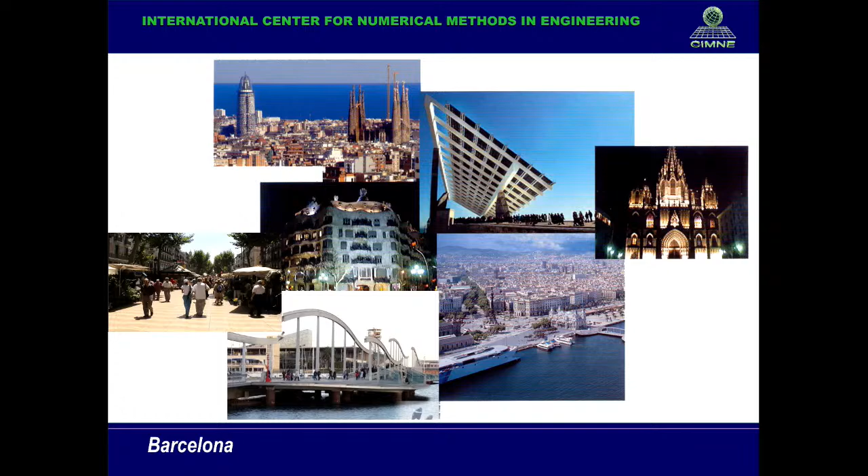And now that I am a member of this community, I invite you as a colleague. We created this organization in Barcelona 35 years back with the aim of being a transverse organization that will take the knowledge that we learn, in my case civil engineering, to other fields.

Now this center has expanded. We have some 300 researchers from many different fields, and we are located in several places in Barcelona. We don't have a CIMNE tower, we have several CIMNE buildings. And this is our new building now, next to my office. In all our buildings, we have a penthouse where you can see the sea.

This is what you see. Well, at the end, you cannot see... oh, this is the sea. This is the Mediterranean Sea.

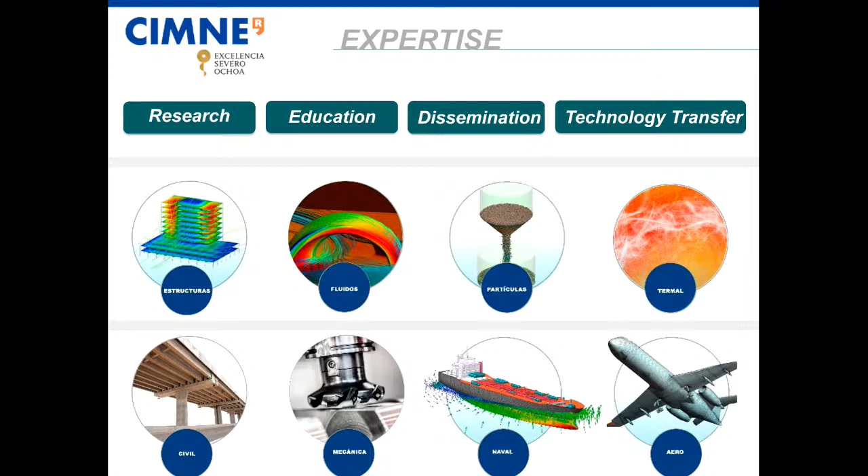As I mentioned, we cover many different fields in mechanics. I'm not going to enter into the details of what we do, but perhaps I will tell you that we have been selected as a National Center for Excellence, and these are the keywords that we use to be selected. We are committed to do research in construction and transport. And transport for us means aeronautics, naval, road transport, railway transport, environment, energy, and security, very important issues. And of course the manufacturing sector and anything to do with new materials, biomaterials, electric-based materials, and metamaterials, materials with unique properties that you manufacture using additive manufacturing techniques.

We are a famous center, but we are not the most famous organization in the city. And we know that, and we have to acknowledge this. So this brings us down to earth. What are the important matters in Barcelona?

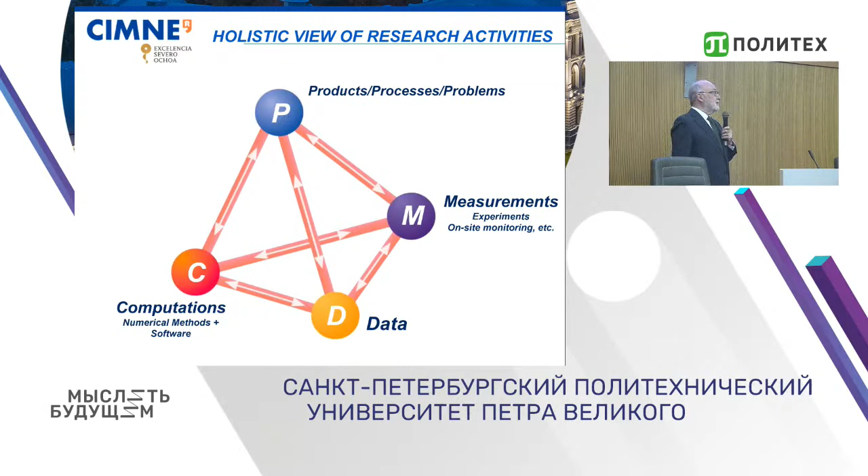Our role is to take any idea that originates in the university, like a plant, like a baby, or like water flowing, it needs to go through different phases. To reach success, you have to succeed in the independent phases. A PhD is the result of research at the university, but a PhD is sometimes not used, or repeated, because the student moves on.

So there is a need to explain that there is a role for these institutes, as you have here. And this is perhaps not the end of the story, it's half of the story. Then the companies do the rest of the work, and then the market, society, is the final ending.

The innovation here is that we have set up this link of cooperation at the university side, and also created our own spin-off companies that help us in this cycle of ideas.

Now coming a little bit more technical, and I'm going to perhaps abuse your patience, I will tell you some very basic things, and perhaps some other things that might be more interesting for those of you who are experts, but I didn't know what was the expertise of the audience in general.

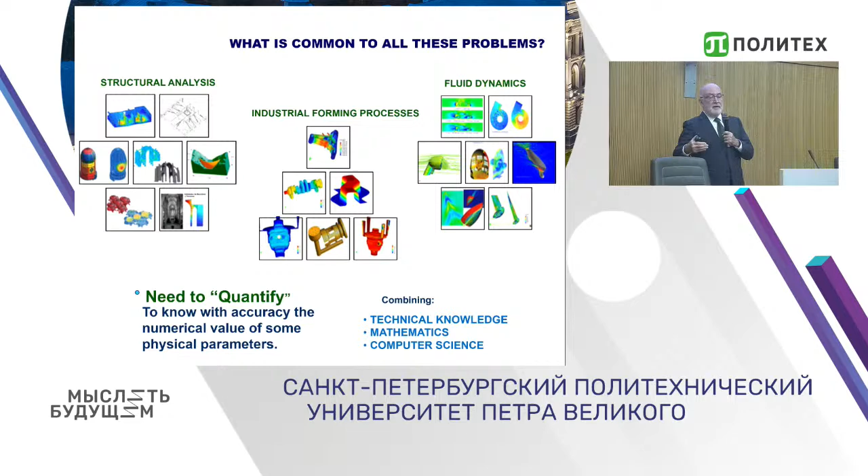To quantify means to produce numbers, we need to know about the problem. It's very important to know about the physics of a mechanical problem, which is different from another one. We need to express this in mathematical equations, and we need to solve these equations.

In fact, everything comes from our perception of reality. We can produce mathematical models, and numerical methods is a tool to apply what we call computational models. So first is the mathematical model, then the computational model, and then comes the numerical methods to solve it.

This sentence impressed me when I read it. It was referring to models in economy, but I borrow it because we are criticized all the time that our methods are not perfect. Perhaps we should say: all computational methods are imperfect, they are not perfect, but some are useful. We have to admit that.

And this is what engineers have been doing all their life throughout history, making use of the available knowledge to produce useful things for humanity.

About reality, this is very important because now we are talking about different kinds of reality altogether. For instance, what is the scale of interest? Are we talking about the subatomic scale where we have numerical methods, or are we talking at the aircraft scale?

For each of these scales, the methods are different and the objectives are different. The mathematical models are different. So this is very important, and one cannot be an expert in all the scales.

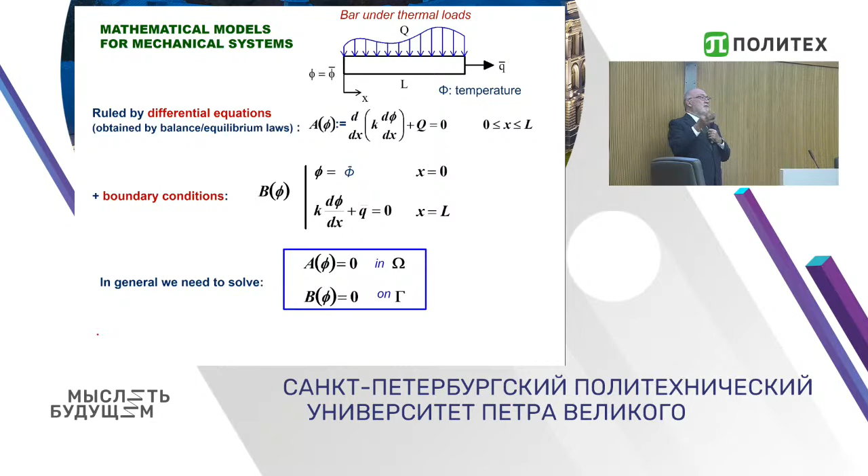This is the simplest differential equation with only one scalar, it's the temperature. But in general, they can be cast in this form: a set of differential equations with the boundary conditions that we need to solve. For years, for centuries, people have been trying to solve them analytically.

First, what we call static problems. Time is not involved in the equations. And you can read here the classes of problems that include these simple equations: structural mechanics and many other problems that are governed by this set of differential equations.

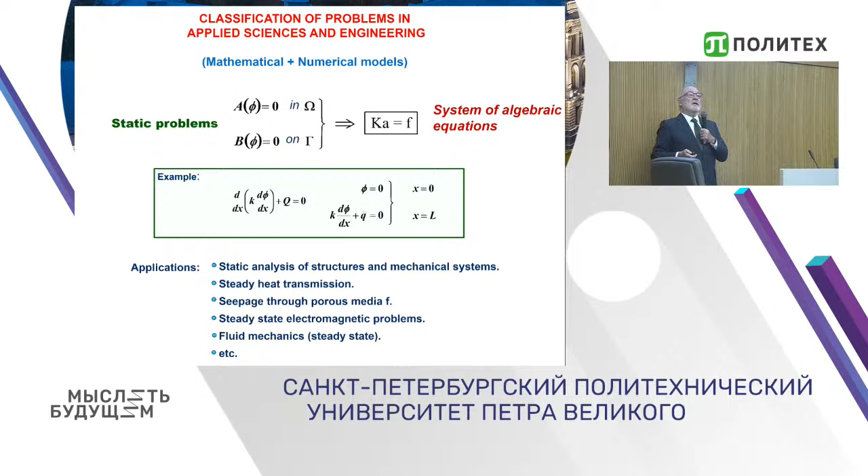When you introduce time, you have a class of problems which is all fluid mechanics problems that are governed by this type of parabolic equations with only the first derivative of the unknown; the velocity is the unknown. So this is a second set of big problems.

And the third class of problems goes back again to structural mechanics or acoustics, which is the second order dynamic problems. Okay? Each of these classes of problems requires a different strategy at the analytical level and at the numerical level. I think with these 3 classes of problems, we cover 90% or even more of the problems in mechanics. And when I say mechanics, I mean physics in general and engineering.

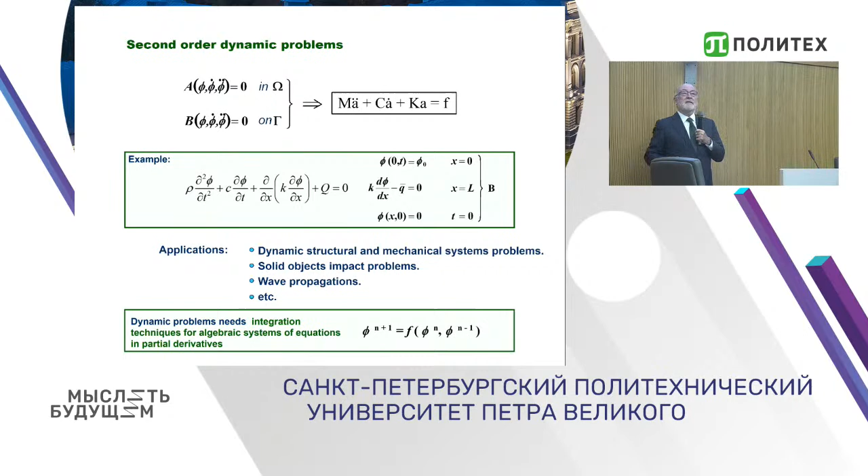And of course, the name of Timoshenko comes here because he spent his life solving analytically the first class of problems, and a little bit the third, dynamic equations. I just mentioned during my small gratitude speech during this honorary doctorate that when I was 19, I was introduced to Timoshenko in the books of elasticity and strength of materials.

And then I learned, we all have learned, and still we are learning about the expressions that he derived, solving analytically those equations. He belongs to the class of engineers who really looked at the equations, got solutions, and these solutions were applied in practice.

But not only Timoshenko. Last Friday, I took these pictures at home. These are books from Russian scientists that I used when I was a student. Most of them were published in Spanish by Mir Publishers, the publishing house from the Soviet Union in those days. I have these books at home; this is my collection of books. And I was very proud to recognize, acknowledge that my background comes from this cultural heritage from your country.

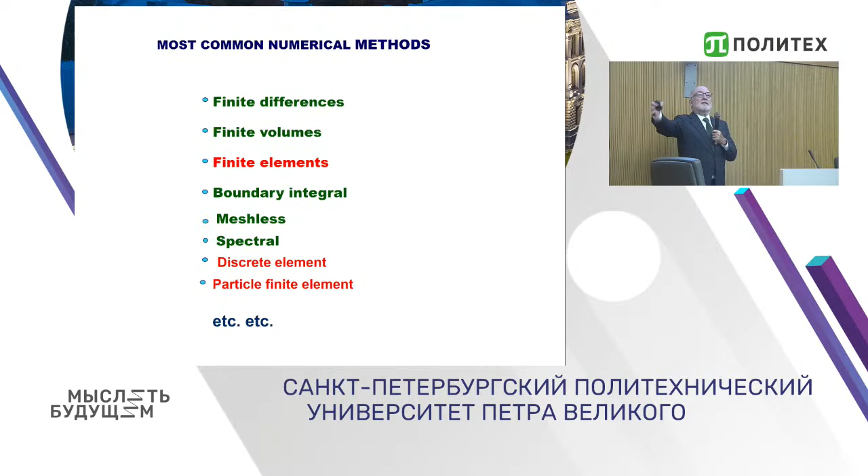And of course, this is not a course on numerical methods. I cannot go step by step revising all the numerical methods. I'm going to talk a little bit about finite elements, which is the recent past and the present, and about some new methods that I think are the future. Okay, and all comes from the so-called variational forms.

You know that most numerical methods are based on the discretization of the domain and using the properties of the integral, that it can be computed by summing the contributions from different domains. And this is the so-called weighted residual form.

You're familiar with this. You multiply the governing equations by weighting functions, and then you assume that the solution of this integral form for any arbitrary function is equivalent to the solution of the original equations. This is the basis of all numerical methods; even finite differences could be cast in this form as well.

And here comes the name of a distinguished academic of this university, Galerkin, together with Ritz and Bubnov, also from this university, and Petrov, also from this country, who developed classes of different methods applied to this general framework of weighted residuals.

And in fact, this is a personal note, I'm sorry, but I'm very proud to carry the name of Galerkin in my curriculum, because I was awarded the Galerkin Medal from the European Association for Computational Methods only this September. So this is a double privilege for me for being here today.

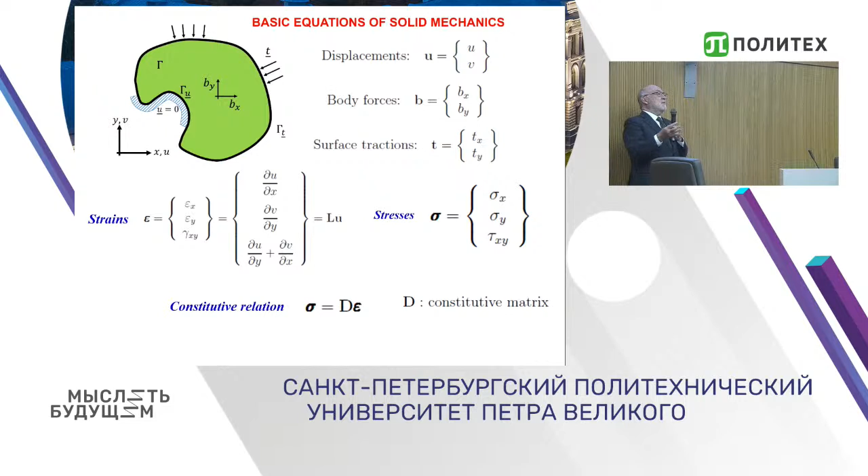Look at a problem in structural mechanics, a simple problem. You have displacements, forces in the boundary, in the body, you have the strains, you have the stresses, you have the constitutive form. This will be the basis for obtaining the differential equations, which are obtained by equilibrium. Sum of forces equals 0 in statics. And this gives you the equilibrium equations in the body and in the boundary. And these are the equations that Timoshenko solved, expressed in terms of displacements.

When we apply weighted residuals, we multiply these by weighting functions. Now, these weighting functions are what we call virtual displacements, and then you obtain the weak form by integrating by parts. What you obtain is the principle of virtual work. So the principle of virtual work is nothing but the Galerkin form of the differential equations in mechanics.

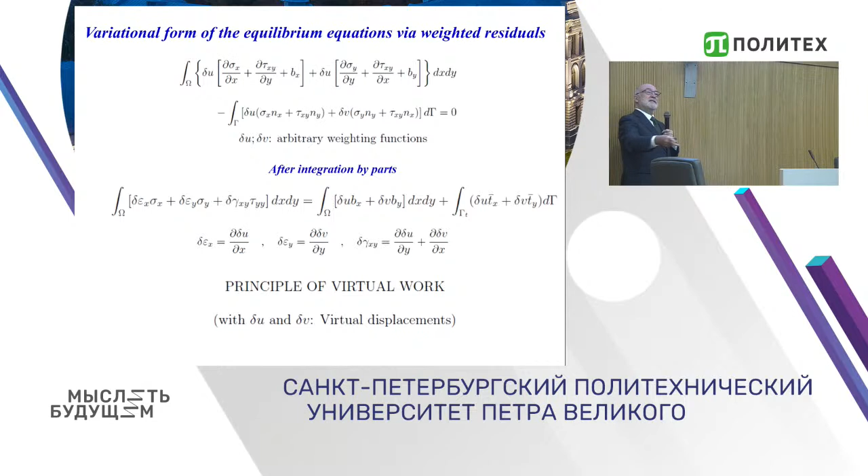But the beauty is that when I lecture in my course to final year students in civil engineering, and I teach finite elements, I don't start with equations, and I don't start with Galerkin. In fact, I don't talk about Galerkin. I start with this expression. It's equivalent. And the beauty is that it also can be interpreted in terms of work. The work of the external forces over any arbitrary displacement is the work of the stresses in equilibrium with the actual forces, the work induced by the virtual strains.

So from this moment on, I don't say we can forget about the past, but we can start from this expression. And this expression is independent of how we obtain the stresses. So it applies to any nonlinear material. It's also independent of the size of the displacement. So it applies to any problems of small or large displacement. It also applies to dynamics. So it's a universal form from which I can derive any approximation method.

And also, if you look back and you interpret the internal work and the external work as a variation of the actual work, you see by this simple manipulation you derive the principle of minimum potential energy. Simply, look, it's expressed in the transparencies. I'm not going to detail. But all the energy theorems that I studied, Castigliano, Menabrea, when I was a student, I was using energy theorems. When I was a postgraduate at Swansea University, I learned that this is a consequence of virtual work.

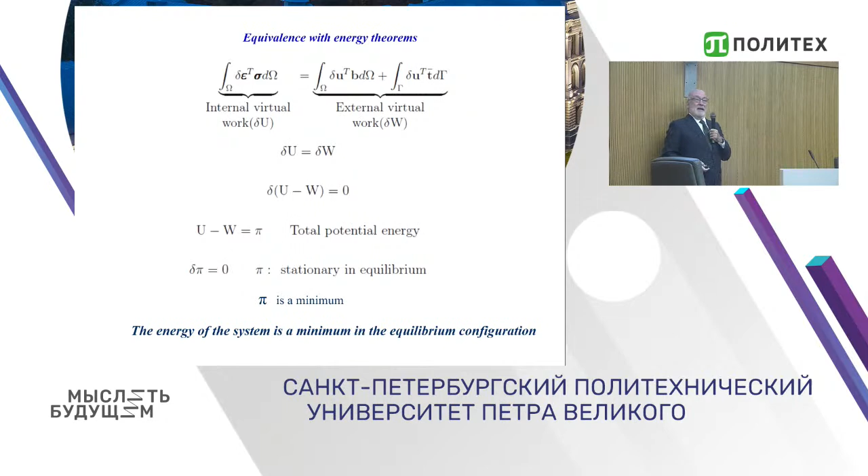And then if you assume that the problem is elastic, and you introduce the elastic constitutive equation, then you have the standard force equals stiffness matrix times the displacements. So you see this. I found this historical development fascinating, because now we have a systematic way to apply any discretization method using virtual work.

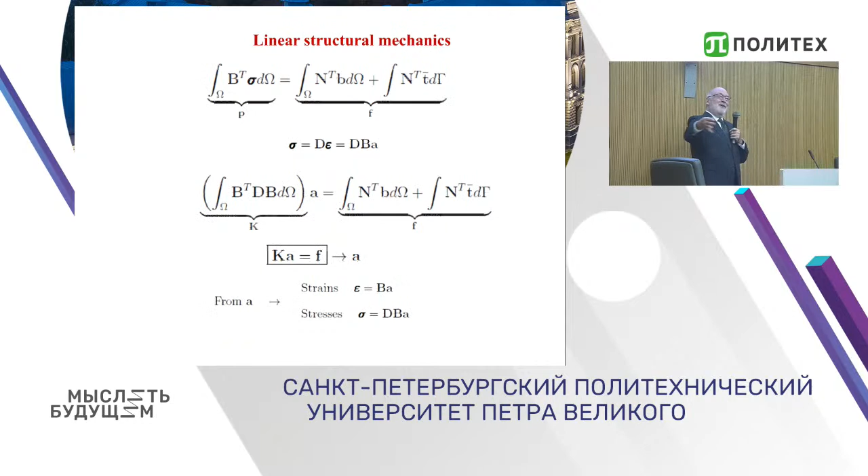Well, it's new. We can see that it's not so new. This is what Archimedes did to compute the pi number. He used an element, the segment. He used a discretization, the number of segments, inscribed or circumscribed, and he obtained bounds for pi.

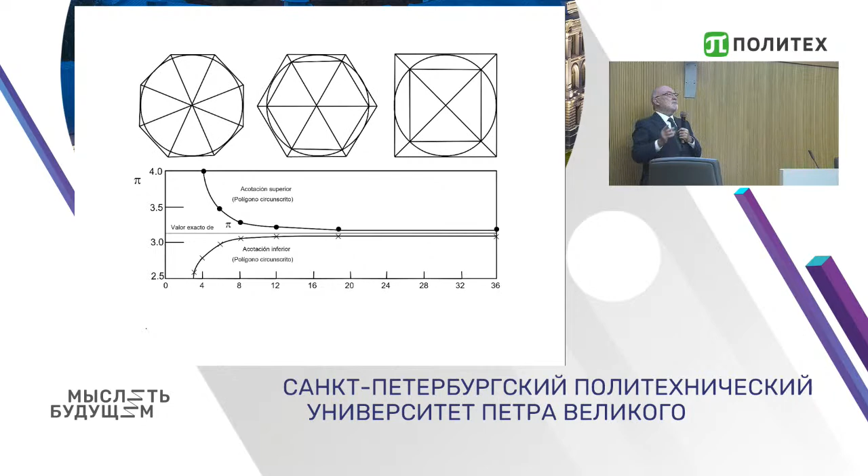By the way, pi is a number with infinite digits. It's a number you cannot compute exactly. So I think this was the first idea of approximation using this concept of discretization and subdivision. This was 300 years before Christ. And it took 7 centuries to find this reference of a Chinese who used the concept of areas to obtain bounds for pi.

So I found this interesting also to put it as a kind of historical background of what we're doing, historical perspective. And in fact, before I learned finite elements, I knew how to compute hydraulic networks. I knew how to compute an electrical network. I knew how to compute a structure using matrix methods. And I knew that I could use the information from an element, use Kirchhoff theorem, sum of fluxes equal the external flux, or sum of forces equal to the force, and go from the element to the structure.

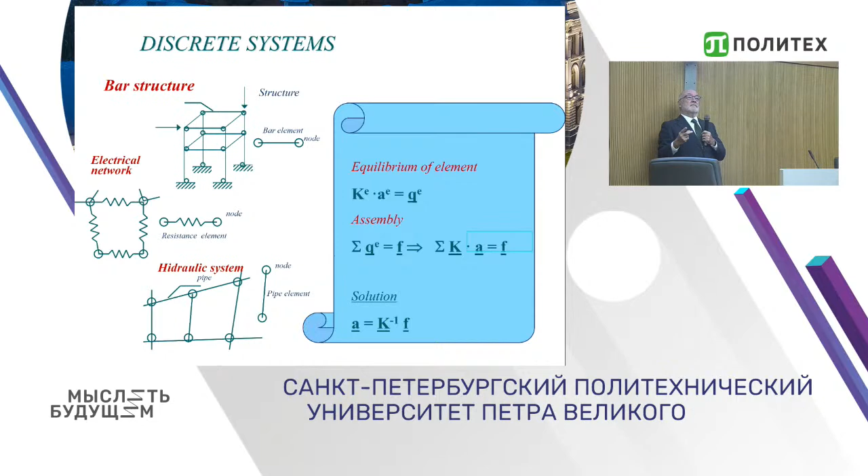And this is what we do with finite elements. In finite elements, we have more complex systems, but you have the same; precisely, this is a copy of the past transparency. But now, the element we create, we don't have a pipe, we don't have an electrical network, we don't have a bar. We invent the element, but we follow the same trend. Look at the element, look to the balance of the element, use a general balance law, and get a general system of equations. Okay, so having understood that, we have made a lot of progress.

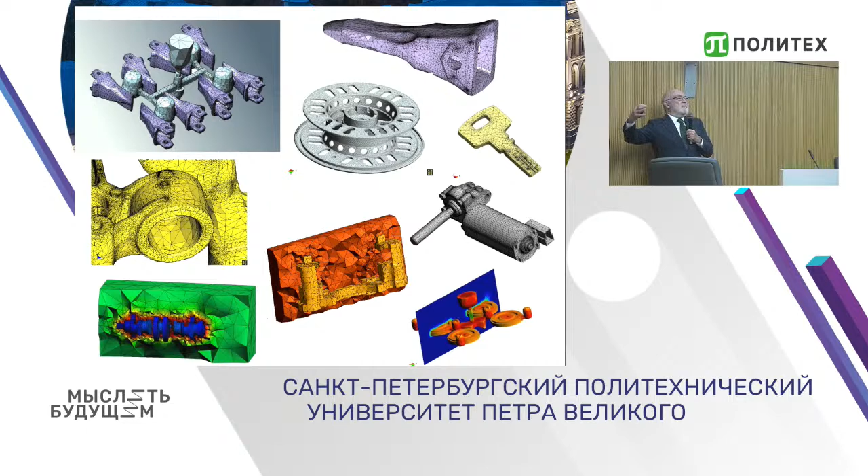The method can be applied, and this is some colorful reference after those equations of how we apply the method in structural mechanics, but I could use many others. In fact, also how we compute the strength of mechanical elements, and how we apply this to the many engineering sectors, in the mechanical manufacturing sector. Just three references if you want to have a collection of these pictures.

By the way, I will be happy to provide this lecture to Professor Borovkov later. If you are interested, you can have it all.

We have to acknowledge the work of Courant. Courant made a reference to discretization of a domain into triangles in 1943. But the first paper which is acknowledged to be the predecessor of the finite element is in 1956, by Turner, Clough, Martin, and Topp. But the name finite elements was not used until 1960, by Clough. Okay, so perhaps some others are missing, and this is like a work for the historian, to look into the archive of history. But this is how

I've been taught. But everything in my life came from a different place, from Swansea. Swansea is a beautiful spot in Wales, beautiful beaches, amazing place. Weather is okay, simply okay. But then I found this man, Professor Zienkiewicz, Olgierd Zienkiewicz. He was there at the right time. In the 1960s, he was a clever guy. He came from relaxation methods, from finite differences. He was from Imperial College, went to the United States. He came to Swansea, and then he saw the trend, and he jumped into the trend.

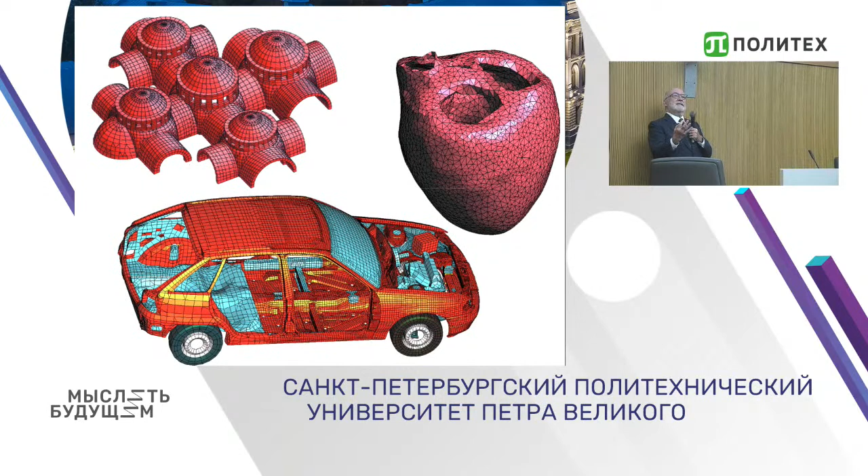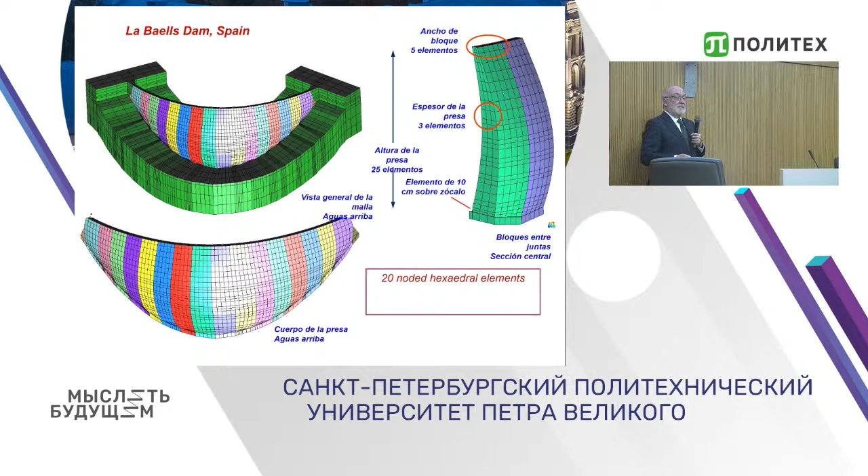In this one, a company is advertising the value of the methods they use to protect the texture of the skin, with finite elements. In the early days, finite elements were applied to dam engineering. Well, this is an early paper, 1970, a dam in China. Now, the use in dams is a regular practice. This is just one example of a dam in Spain. These are exercises that our students do to apply the methods that we teach them. So dam engineering is a reference for the past, and also for the present.

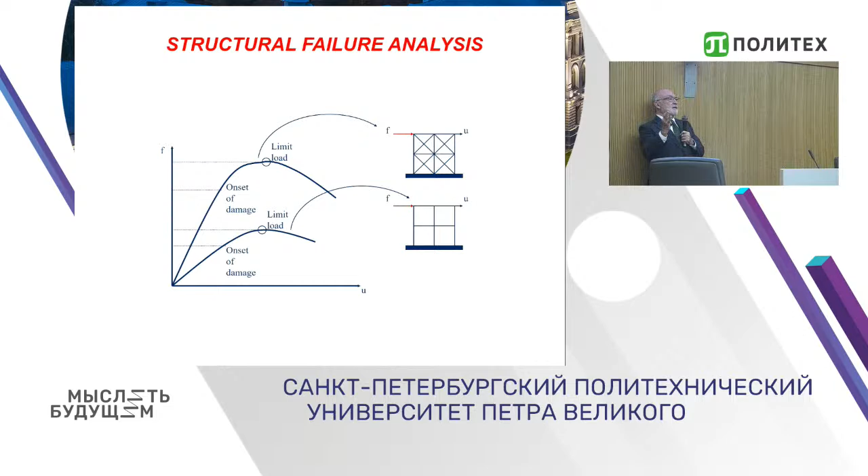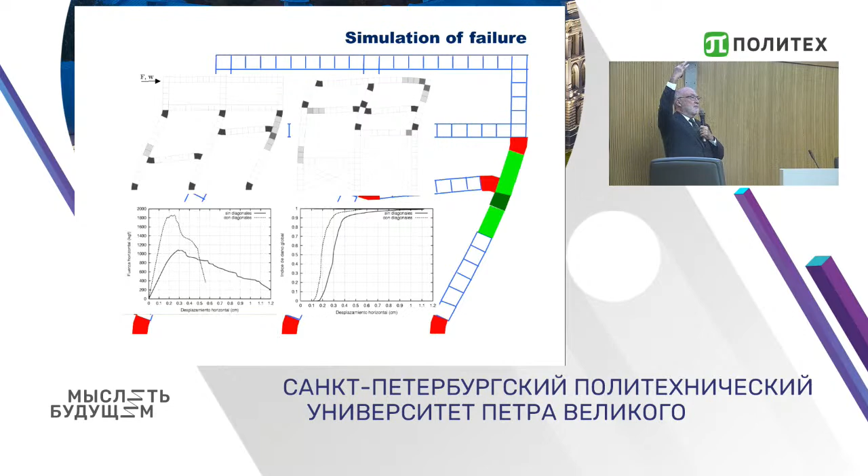But of course, we are not only interested in the design of buildings. We are interested in knowing the safety, how to protect the buildings, or how to enhance their properties by retrofitting some of the buildings. We're interested to see when cracks start, which is the failure load, and for that we need nonlinear analysis. And here comes the concept of virtual lab. A virtual lab is a lab that you build in the computer, and with that you break the structures, and you compare with some experiments. With this virtual lab we can push the structure and see when it fails, and we can see how we can reinforce some parts and get higher loads and improve the behavior.

And we have applied this concept to what is called forensic engineering. This building had many cracks. Why? Well, we take the building, we discretize, we increase the weight of the floor, we see when it fails, we see the cracks, and we compare this with existing cracks. This is called forensic engineering. Forensic engineering requires nonlinear mechanics. And this is very much applied now in the nuclear sector in Spain. We are still today involved in the study of the predicted safety of the nuclear plants in Spain.

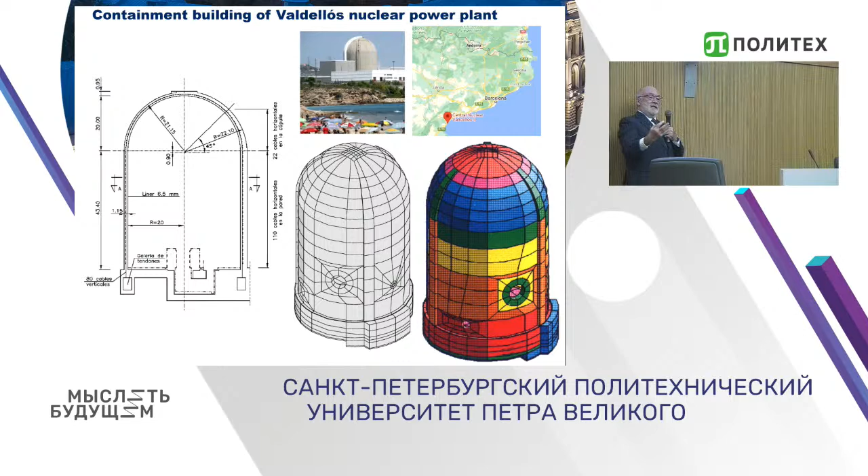There is a big debate in the world, and we are guessing that nuclear power is going to stay, for many reasons. What we are doing here is we see what will be the failure load of this containment building when, for instance, there is an increase of pressure inside. So we increase the pressure until we obtain the failure load. The colors are nice, but this is the main curve, which shows that as you increase the pressure you get damage, until the global damage reaches 1, and this gives you the failure pressure. And this is the comparison between axisymmetric and three-dimensional analysis. So this is what we are doing now with a number of power plants in Spain.

But this is also applied in historical buildings. Of course, here the financial or social interest is less important, but in Italy there is a big interest. There is a congress in this field that we have been organizing over the years. And for instance, I wasn't paid for this. The reward we got is that I walked on the roof of the basilica, and I could see that, for instance, these towers are fake. They are wood and copper, and the actual domes are of stone, and you can see them here. And here is the same.

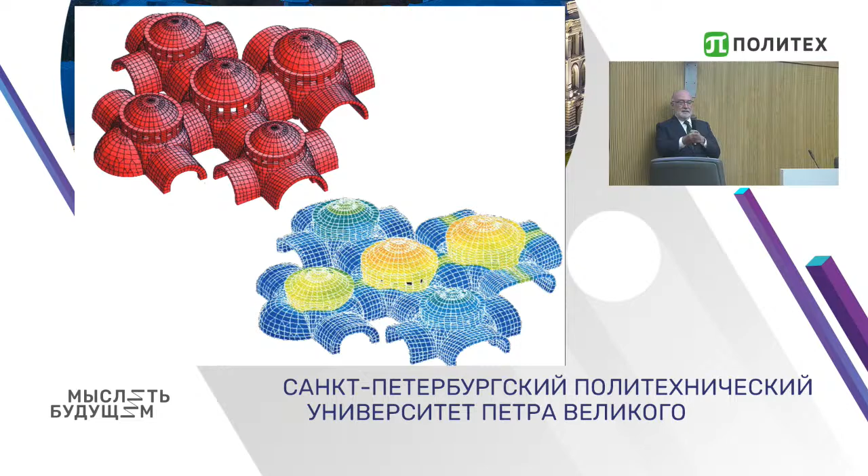We increase the weight. Damage produces the colors. There is no damage until you reach failure, and you can compute the cracks and the failure load. So another case for which we obtained the City of Barcelona award. For these color pictures, we were given an award.

And of course, we didn't know anything about the materials, so I think this was a non-deserved award, but we took it in any case. And you can see the concept of failure of a historical building. You increase the pressure, you increase the weight, and as you increase the weight, you can see that you actually destroy the structure. It's the virtual failure lab.

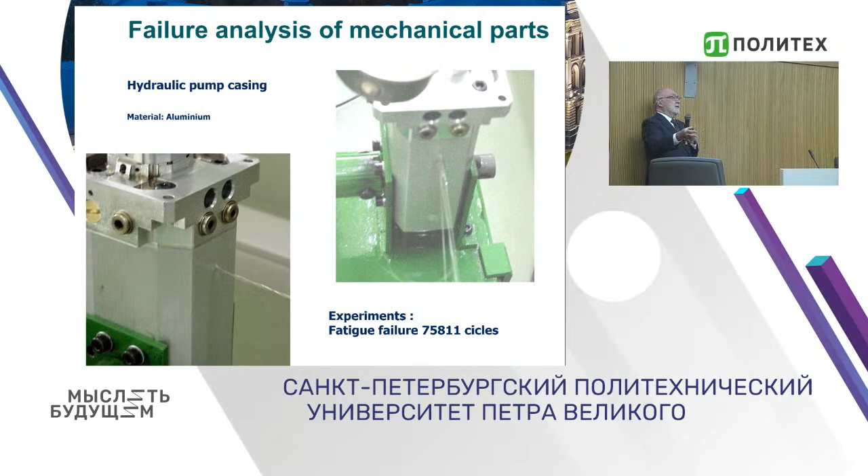You can apply it to real structures or to mechanical parts. This was the failure law applied to compute the failure, the number of cycles for failure of this pump casing that we computed. It's the same concept. Or to compute here, for instance, well, I will not put the video, the failure load of this composite that you can compare with experiments.

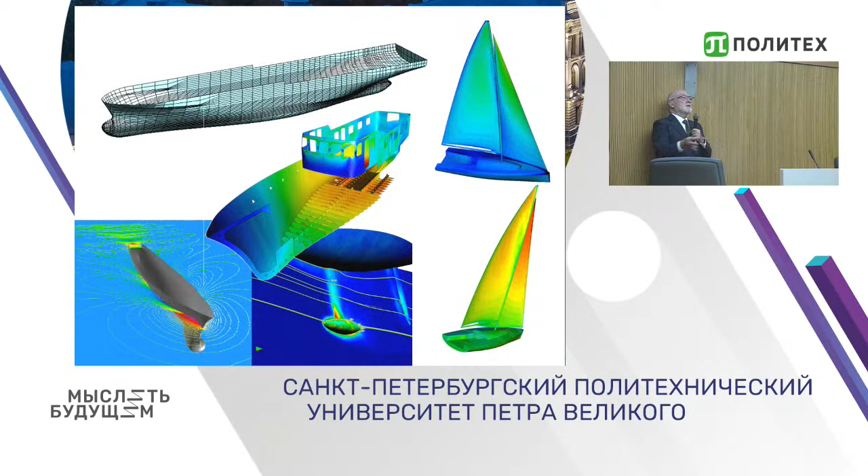A virtual towing tank is a space where you put your ship and you tow it and you compute the resistance. In this virtual tank you have to fill it with elements, then you put your ship and then push it. Here is a video that shows how this is like Moses; you fill the sea with tetrahedra, then you put your ship, and then you have to pull it. This brings us the problem of mesh generation and controlling geometry, which are very important parts of the analysis. This is an America's Cup boat, and then the importance of visualizing the results.

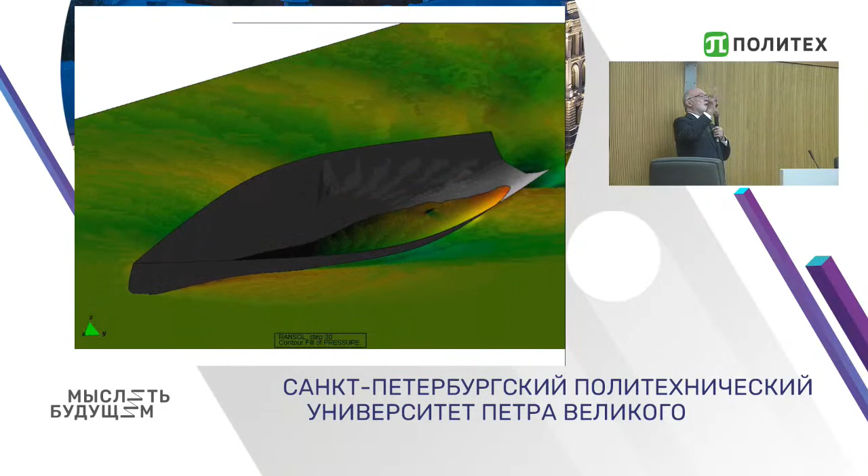Some people say that CFD is color fluid dynamics. Well, it is true that colors are very important, but numbers are also very important. So, in fact, numbers are more important. So this is just an example of how this is applied.

When you're dealing with fluids, you have the equivalent to the simply supported beam: you throw a sphere in water and you have to compute the speed at which it falls. And this is a very complex problem. It requires moving the mesh, and even the simplest problem sometimes we cannot solve because we don't have this technology. You obtain beautiful pictures, but at the end you have to compute. There is an analytical solution for that.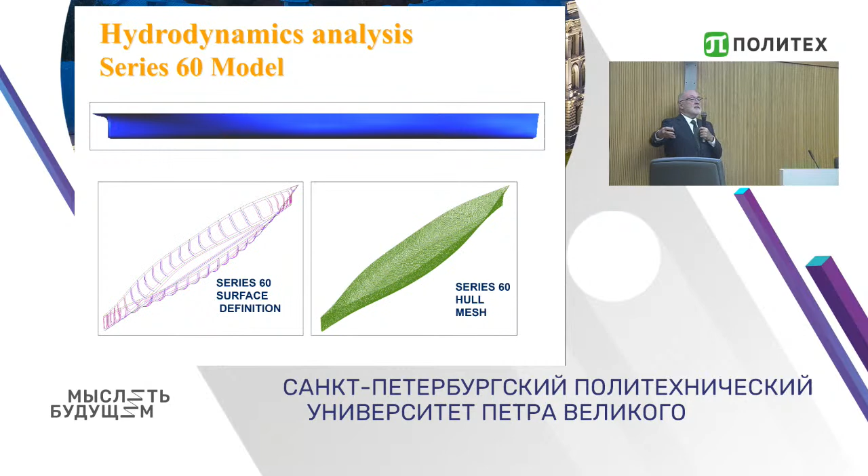And then you apply this to problems that the Naval Architecture School does as everyday practice. They take a model of a boat, put it in the canal, drag it, and compute the forces. With these forces, they compute the wave pattern and the resistance of the boat. Again, beautiful pictures, but this is the main result: the so-called drag resistance to Froude number. And this is the curve that is used to design the ships.

This curve you can obtain by experiments and then projecting to real scale, or by the virtual towing tank, and apply it to the design of merchant ships, or other ships not so nice, like this frigate. And here comes a problem. If you are given this data, how long will it take you to create the data for the analysis? For that, we have developed our own pre and post processors that you can freely use. This helps us clean this complex geometry and produce an analysis geometry like this one, from which we can actually do the computations.

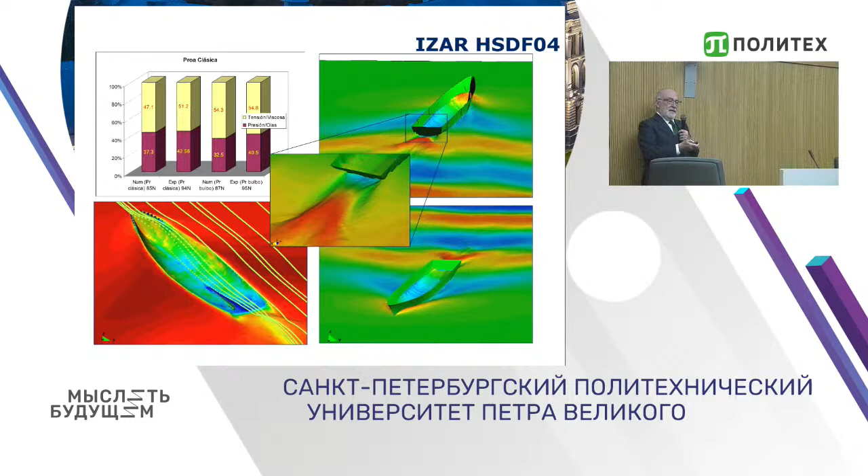So using this, we obtain the results, or do the structural analysis, which is like computing a building. These are examples of the virtual towing tank applied to this problem and this other one. This is an area of much interest now because of the global climate and the ice routes in the Arctic.

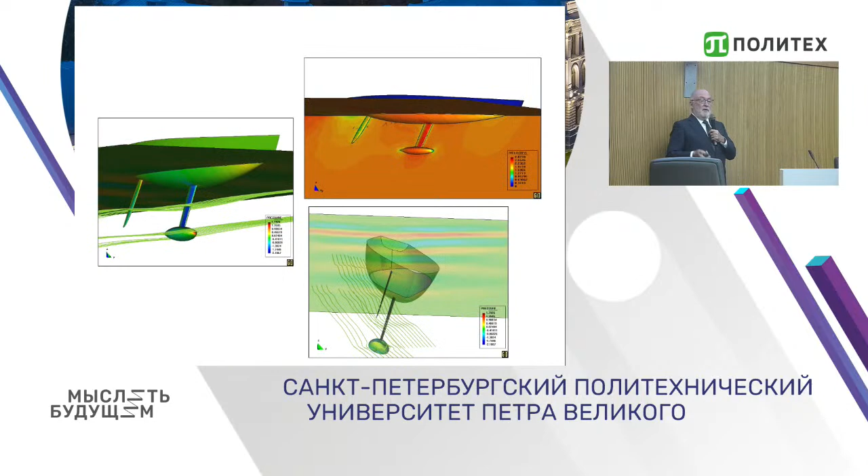And of course, if you don't like frigates or merchant ships, you can do sport boats like this America's Cup boat that we analyzed. We analyze the underwater behavior, and we compute at the end these curves, the drag and the forces in the longitudinal and transverse direction, which are used to design the boat. But of course, you also have to look at the sails.

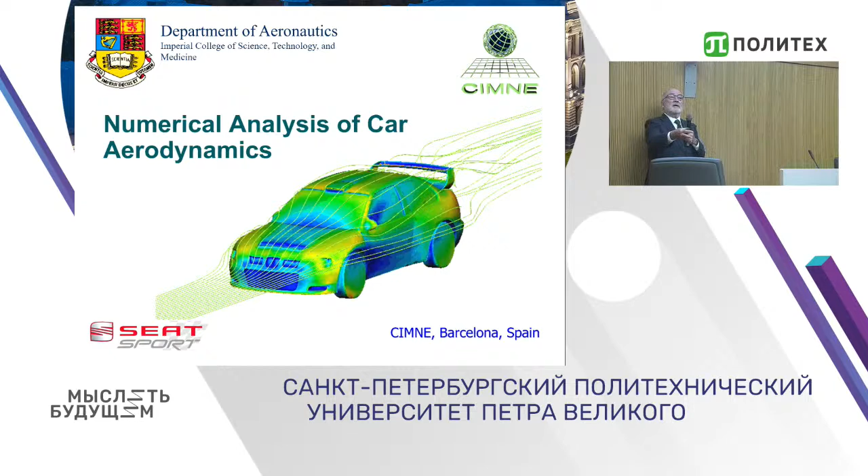Our students today can use these tools for their final year projects. This is an MSc project from a student at Imperial College, who used it to clean the geometry and put it into the virtual wind tunnel. I'm borrowing from his thesis project. They compute the airflow and the pressures and results. 20 years ago this was very hard, now it can be done.

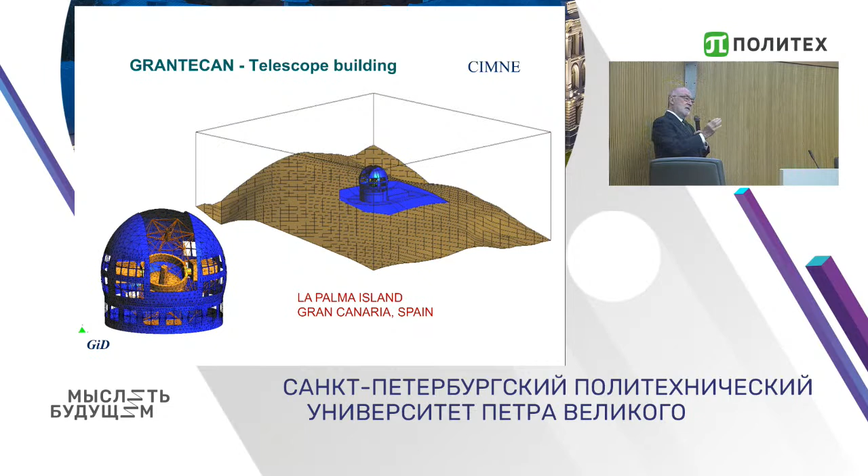In La Palma, there is a volcano now, a terrible situation. La Palma is also one of the largest observatories of the sky in the world. This is a large telescope on a mountain in the other part of the island, called Roque de los Muchachos. This telescope has a 10 meter diameter mirror, so it's quite big, built in segments. We analyze the aerodynamics of the structures, how the wind will move inside the structure so it doesn't pollute the vision at night.

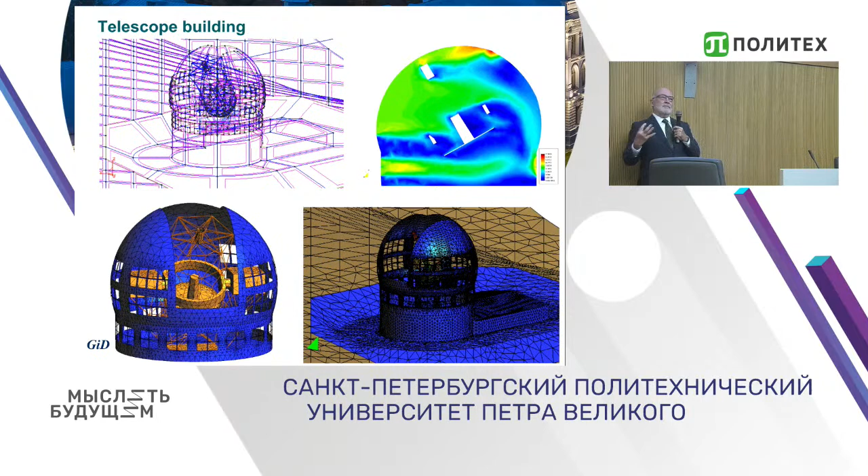You could have the best fluid mechanics program in the world, the best theory, but here is a problem of data management. You have to manage the data from the telescope and transfer it to the mesh generator. The management of the pre and post processing is equally important as the result. For instance, this is a transverse cut over a tetrahedral mesh.

In aerodynamics, the structure is a boundary condition. The air flows in the mesh that you create, and the structure is a boundary condition for the air. You can see here how the air is moving inside the structure, and you compute the time the particle takes inside the telescope, etc. So this is an interesting problem.

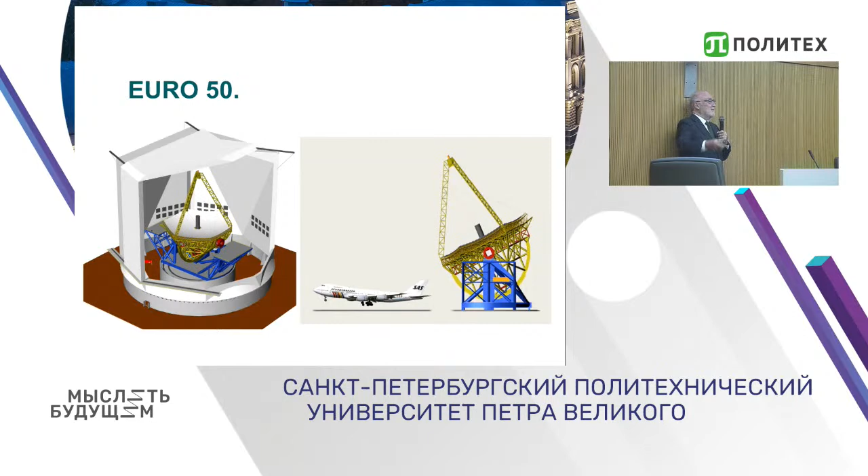The astronomical community is making sure they'll have work for the next 200 years. This was a 10 meter diameter telescope. Now in Europe they're pushing a 50 meter telescope, though they don't know when it will be built - probably not in our lifetime, maybe in 50 years. But there's already a group working on a 100 meter telescope, and they already have pictures of this 100 meter mirror telescope. We're trying to be part of this project because we will live forever in terms of research interest if we're part of this initiative.

Wind is used now for pollution studies. In Barcelona, we compute the airflow in the city and study how a pollution source will propagate. This is very trendy, and I would like to mention it here as one priority.

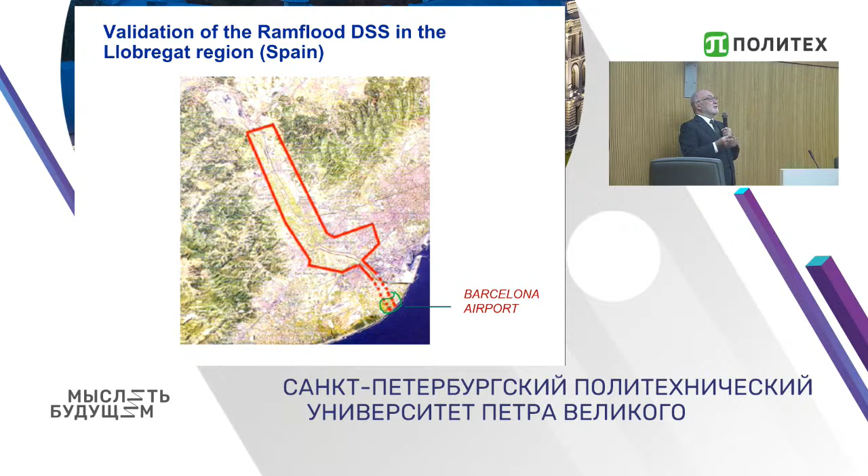Going back to water and environmental mechanics, we have a laboratory called Flumen where we study the flow of rivers and reservoirs. This is the study of the flow of a river next to Barcelona airport, because the river mouth is at the airport. Here you do river dynamics, using fluid mechanics models based on simplified Navier-Stokes equations for so-called 2.5D shallow water flows.

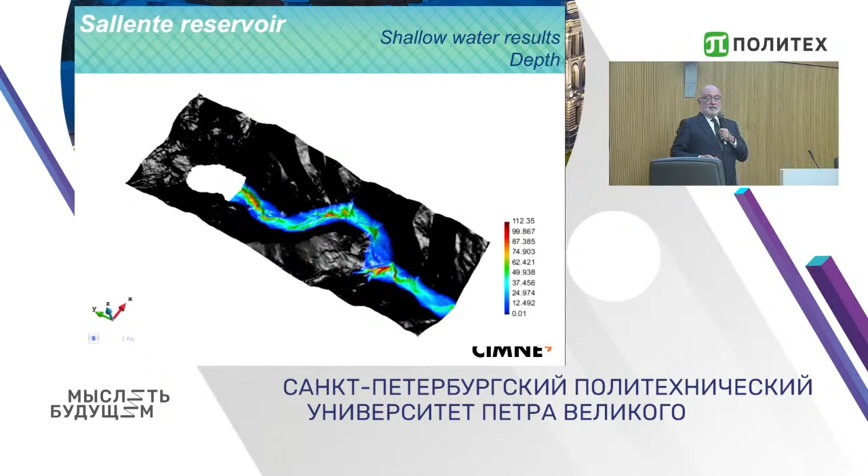Or for a reservoir, you see models of how it will invade the land if there's a problem. Or for a city like Mataró near Barcelona, how flooding will affect it. This is just to show different fields where these methods are applied today. We've even imagined how a tsunami will affect Barcelona - my house is in this part of the city, so this was a simple exercise. Tsunamis don't occur in the Mediterranean, they occur in other parts of the world, but this was an exercise to see how it would affect the city.

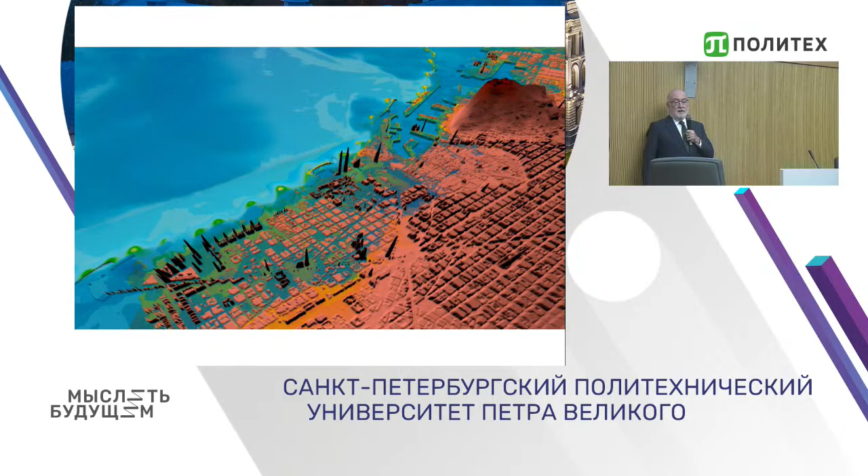Now, from the sails of the ship, we move to airbags, and then we move to inflatable structures.

Inflatable structures are not used only for kids. We created a spin-off company from CIMNE to exploit these inflatable structures. In this case, it was exploited for a museum, an itinerant museum. These are inflatable tubes, low pressure, 0.15 millibars, excuse me, 20 millibars.

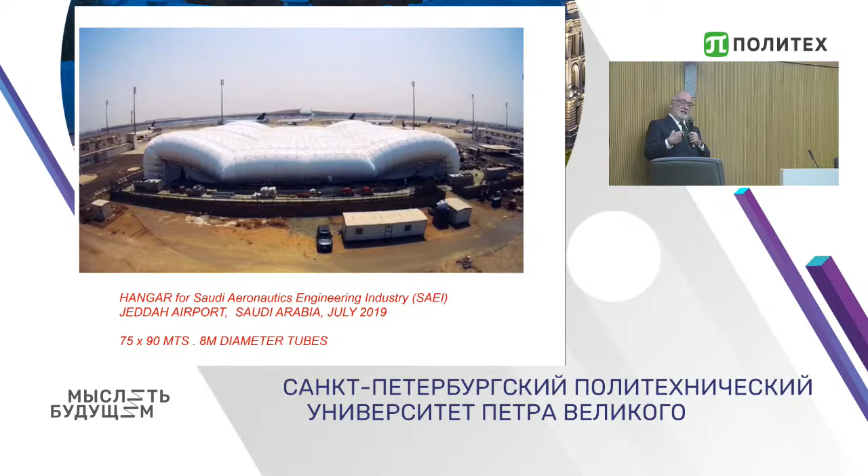This one is in Saudi Arabia. You can see how this structure, which would take months to build, is inflated in only 1 day with 8-meter diameter tubes. Here you have to apply aerodynamics for the air forces on the structure, and also structural mechanics concepts for the analysis of these membranes with cables. This is a new area we would like to explore, cooperation with you here in this area.

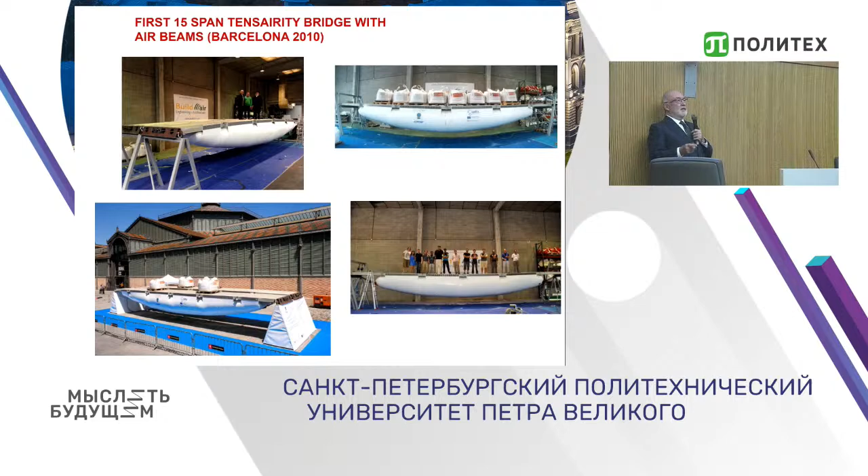Bridges for emergencies. We are engineers. Light bridges, not steel bridges like those used in the Second World War. These are bridges with an inflatable beam, some cables, and a very light slab that you can actually carry even in a helicopter. We have now produced 30 meter span bridges and 50 meter span bridges. These are lightweight structures for many applications, but mostly for emergencies, which I wanted to bring here.

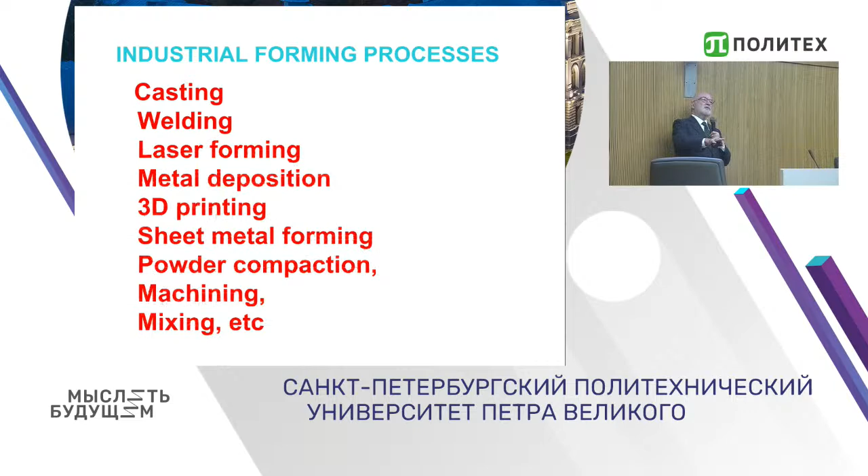To enter into the world of manufacturing processes would take a long time. So this is only a list of problems you can address with computational mechanics. I did my PhD, for instance, in sheet metal forming. This was my field in Swansea. But if there is a field where there is a future for quantitative methods, it is industrial processes, because accuracy is very important. I'm only showing here examples.

Casting. Here we have very complex geometries. We have to fill with a metal at 1200 degrees. Then there is solidification. So handling of complex geometry is essential, fluid mechanics, heat transfer, solidification, and then coupled with structural analysis to compute the strength of the part.

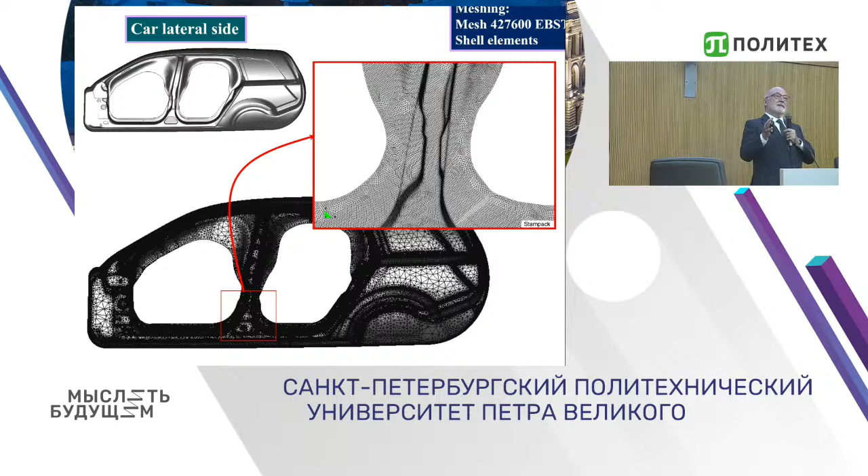Let me move on. Metal forming: a part that you form by pressing, performing a number of applications, using very fine meshes, computing the safety in terms of breakage. This is a very hot area, a very important area. Deformation of metal parts - you analyze this part and predict if it is going to fail or not before you actually manufacture the real piece.

This is another problem. Let me come to the final part of my presentation, which is producing waves and their impact on ships, or impacting on harbors, or impacting on structures like offshore structures. For that you need a different technology.

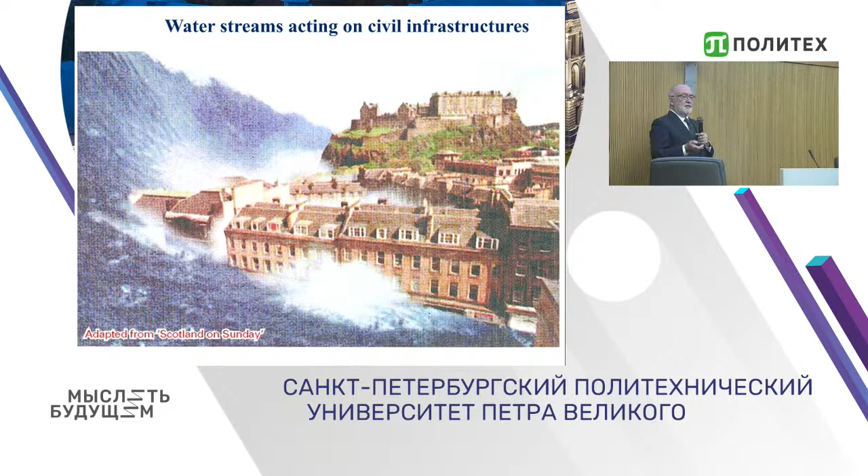We have developed a new approach that combines techniques from particle methods and finite element methods. This is called PFEM. I'm going to explain it to you without equations.

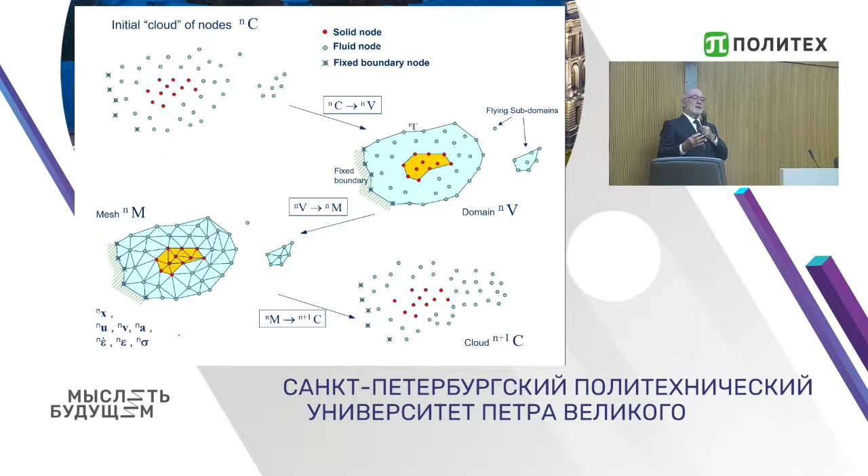This is what we call the particle finite element method: from the particles to the domain, from the domain to the mesh, and then again from the domain we abandon the mesh, and we repeat this process a number of times.

This is a very powerful technique we have developed that introduces computational geometry, because you have to identify a boundary from a cloud of points, requiring advanced mesh generators—but now they are very fast. With this, you can solve problems like a polymer or a rock. You can see in the first row the particles, the domain, and the mesh. As the rock is being excavated, or the polymer is burning, you are changing the geometry of the problem.

This has allowed us to introduce concepts from structural mechanics into fluid mechanics, because we use what is called a Lagrangian formulation. In Lagrangian methods, you have an initial configuration, an actual configuration, and a current configuration. In classical fluid mechanics, you use Eulerian approaches, where you look at the domain and see the flow passing. Here we follow every particle of the fluid, using the equations of structural mechanics to solve the movement of fluids and bodies together.

These are the equations we are solving: the equilibrium equation presented at the beginning, the constitutive equation for the deviatoric stresses and the pressure—and we could also add temperature. So this is nothing but the first equations I presented at the beginning, now applied to fluids.

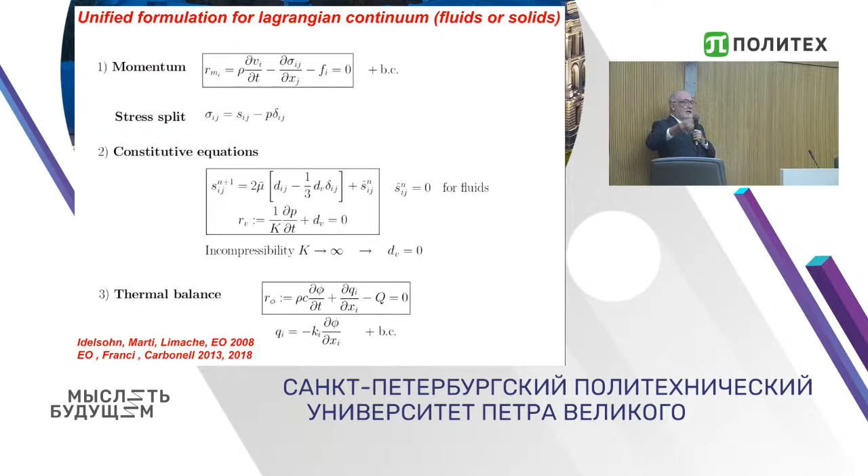Quite impressive results of moving bodies in water—bodies impacting walls, for instance. In this case I won't go into the details, as I don't want to take too long. Bodies that you can actually throw into water.

Methods you can use to study the effect of waves on breakwaters, or the effect of waves on moving bodies like a lorry.

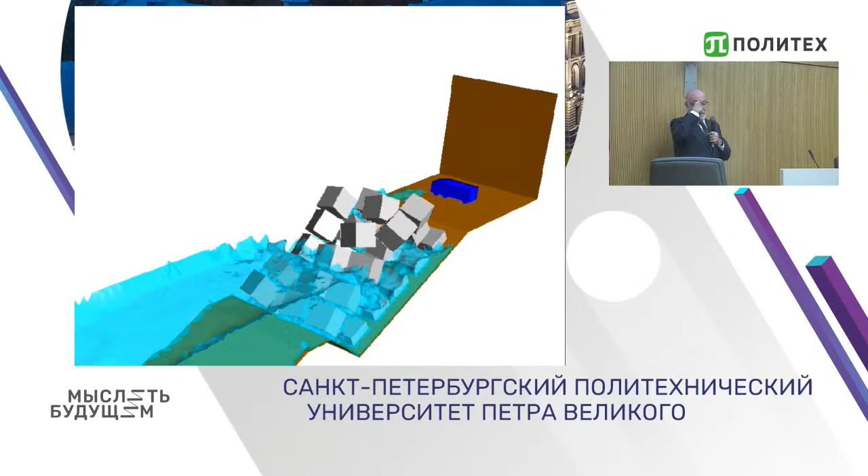By combining concepts of structural mechanics into fluid mechanics using these Lagrangian approaches—reproducing the domain and the mesh at every time step—you obtain amazing new results.

Remember I told you this could be a rock I was excavating? This is how we excavate the domain. Here you can have a soft domain, or you can have a hard domain. The method is the same, but the difference is in the type of soil you're excavating.

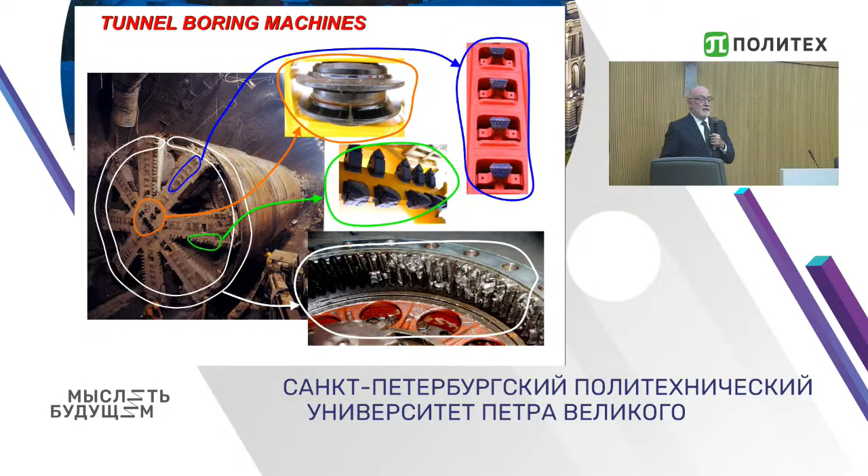For instance, we have applied this to tunneling, to excavate tunnels. You can see here—think of any other method. No other method could do this as easily, combining these two techniques. So this is a new trend that I really think is the future.

With that, I could use my last 10 minutes to tell you a little about the challenge for the near future. I started slow, then went very fast through a number of concepts and methods, but I think you're getting a glimpse of what's going on here.

What is the challenge now? Some of these flows, as you see in the tsunami, have particles inside—it's not only fluid. For instance, in food mechanics, you have fluids and particles of all kinds, as in the pharmaceutical industry. What you want is to actually be able to deal with particulate flows.

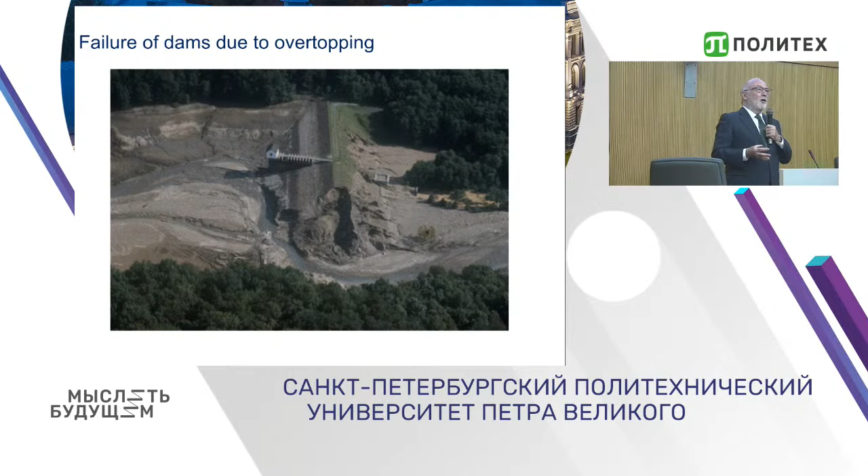In these cargoes, you have grain, things moving inside, so you want to model the whole thing. Or if you want to study ships moving in the Arctic, you need to deal with particles—the ice particles. Or when a dam is failing—this is my hometown, Valencia, where the whole dam was wiped away—you want to see how the dam flows in this catastrophe, with the particulate flows.

Environmental problems always involve flows which contain particles. Sometimes the particles are very small rocks, or sometimes it's a cow or a car. Not to mention all these other events you know that involve particles and fluids—particles and fluids.

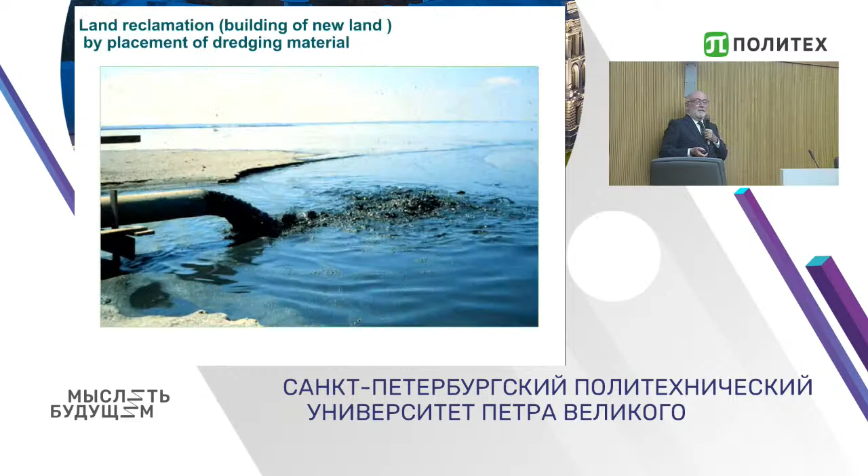Anyway, I don't need to insist on the importance of this problem. And here what we are doing, we introduce the PFEM with particles and the fluids. So how do you do that? Very easy, not quite easy, I said. Coming from structural mechanics, well, in the oil and gas industry, we are working here. This will be another lecture, how we produce the particles 6 kilometers under the ground, and we take them to the surface in these small tubes. They are transported by a fluid, bentonite.

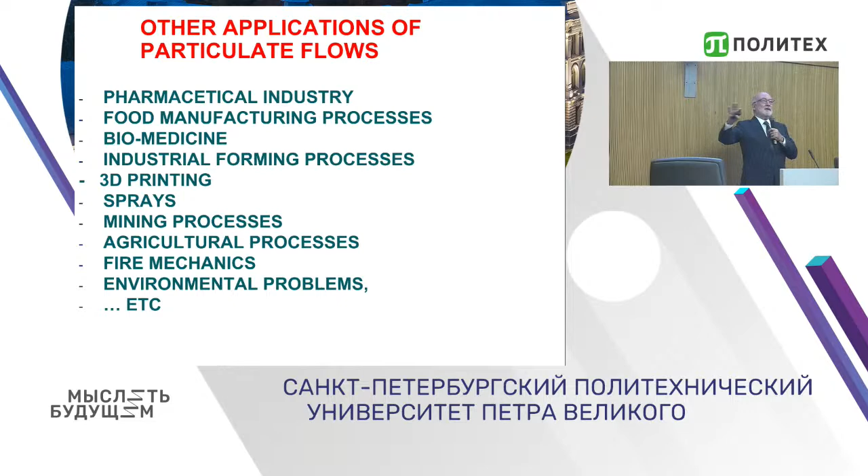The number of problems in particle flows is greater than in structural mechanics. Believe me. There is an industry behind. You will be surprised. We have a conference on this topic. It's called particle methods, and I am more and more surprised. So we have to develop methods to deal with particles. And there is a method called the discrete element method. I don't have time to explain it, because you need to know how these particles interact, and then you have to put them in a fluid.

In the discrete element method, there are two classes of problems. The non-cohesive or the cohesive. Okay? This is non-cohesive. And the discrete element method is governed by the interactions of the particles. I didn't mention, but this is very simple. The equations are Newton's law applied to the forces between the particles. And the particles could have any shape. And then you have the cohesive particles. To introduce the cohesive forces,

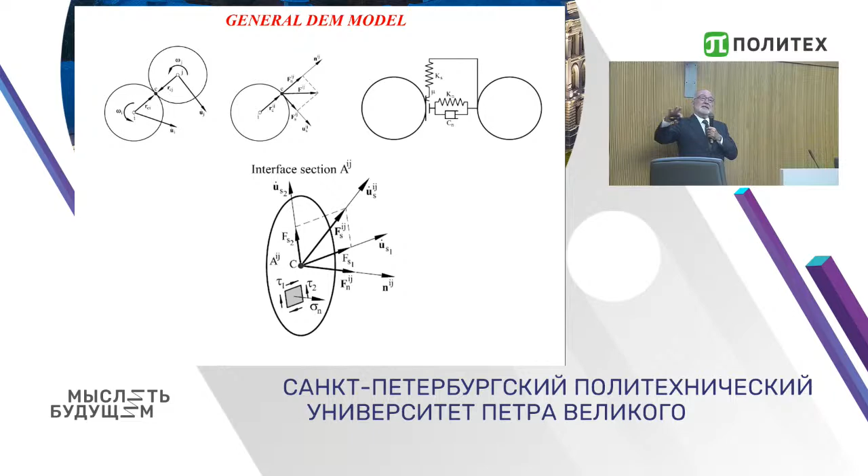there is a community of people who are dealing with the equations between the tangential and normal forces in particles, and they don't know anything about differential equations. So this is a completely different community, and we have learned this, and we have developed methods to model the discrete element method. And what we are doing now, we are blending the discrete element method with the finite element method. What do you mean? Well, we have a mesh of finite elements, and when we see that the fracture is initiating, we put discrete elements. And this is what you get.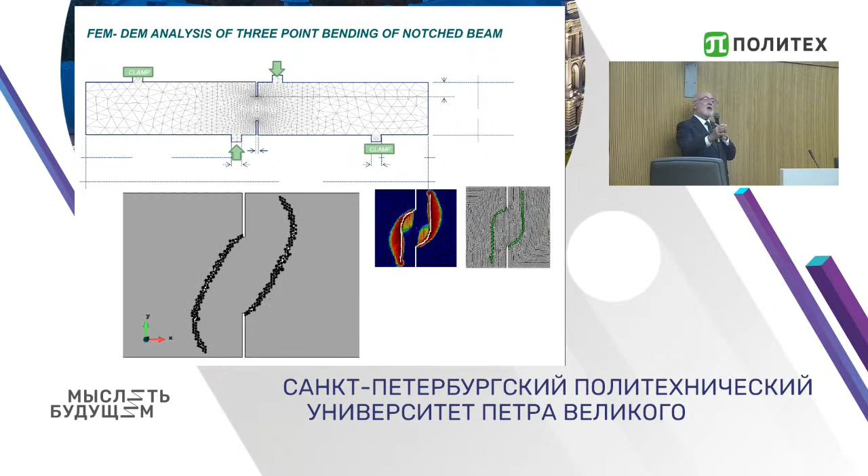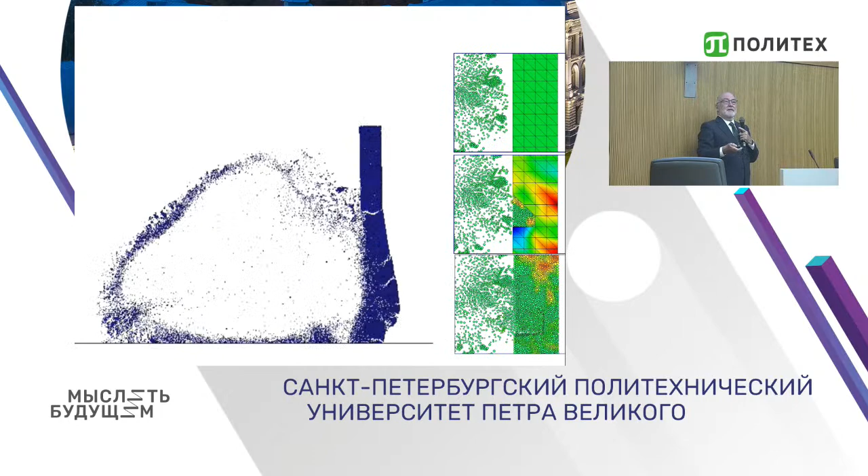So, think, for instance, you have a big wave, it impacts against a wall. How are you going to break it? Well, this is a method that we use. A tunnel. You have here the front of a tunnel, and you have explosions. And this is a finite element mesh, and when the elements break, we introduce these discrete elements. You see? It's the blending of elements. It's like the blending of cultures. This is what we are seeing in Europe. You have a method that comes from outside, and we introduce it to do things that we could not do before. These problems cannot be solved only with one method.

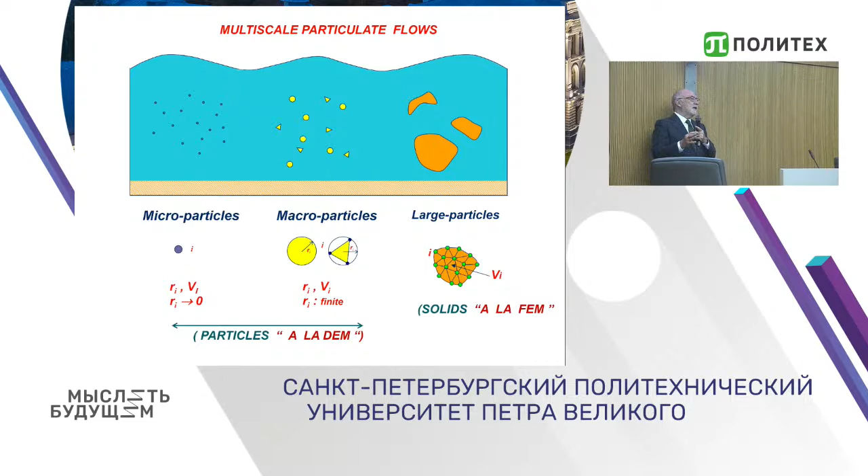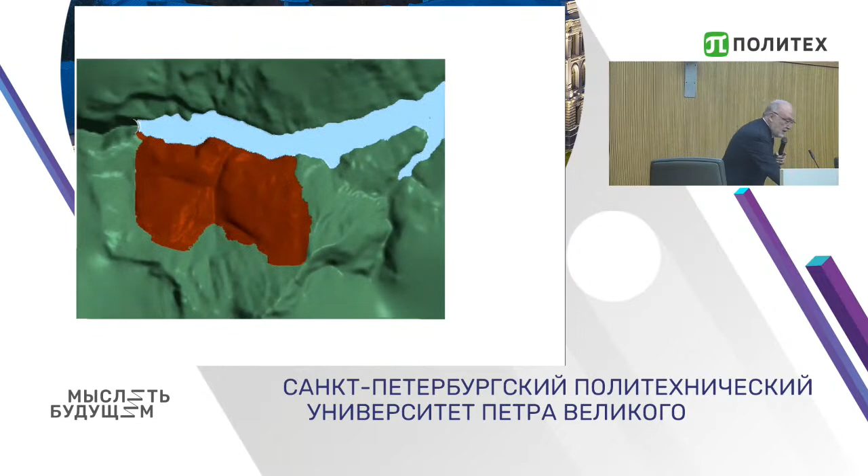This is the rest, you see? This is what I mean. You have a slope, you have the flow with the PFEM, you have the wall falling, you have the car falling. You can move rocks. You can do landslides, but landslides over reservoirs. So you have the ground falling. This is the Vajont landslide. You can actually bring the mountain inside the reservoir, and there is the flow mixing of water and particles. And now you can do this. You see?

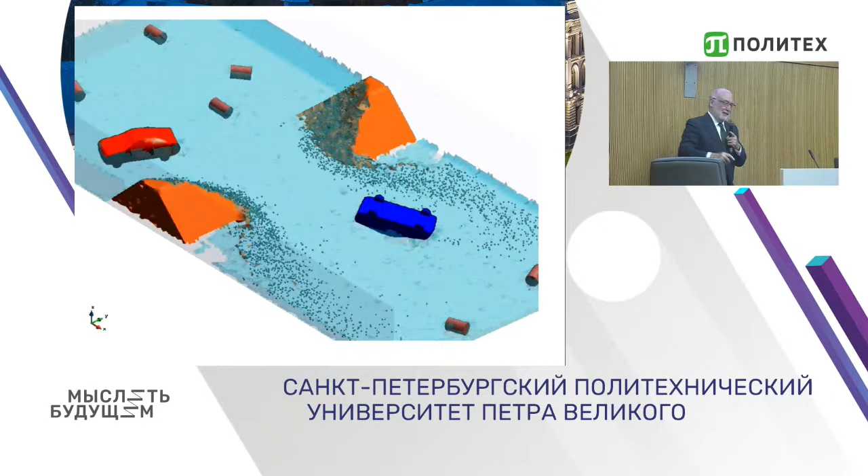So this is a very promising trend. And the message is simple: blending methods, finite elements with computational geometry, and then the particles. And the difficult part is in the finite elements, differential equations. People dealing with particles, I tell you, they don't know anything about differential equations, and they survive. So let me just go to the last 5 minutes.

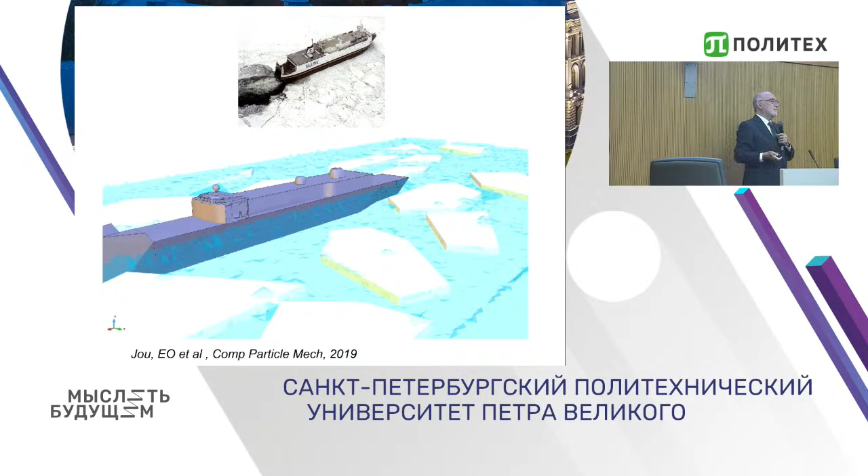Perhaps I take 1 more minute to tell you, because this is something that could be of your interest. This is going to be a hot topic, not only from the economical and political but from the engineering point of view, how this de-icing is going to affect us. Well, we will have ships moving in ice, but ice is going to break, and then you have to introduce the properties of the ice, and you have to design new ships that could move in these icy waters.

You can see you have the buoyancy effect. This is soft ice, and this is hard ice, and the fracture is different. So these are discrete elements with cohesion, modeling ice, impacting with the ship. Okay, so this is how this is moving. So I wanted to bring this topic because I think it's closer to you than to us. But if you compute the forces.

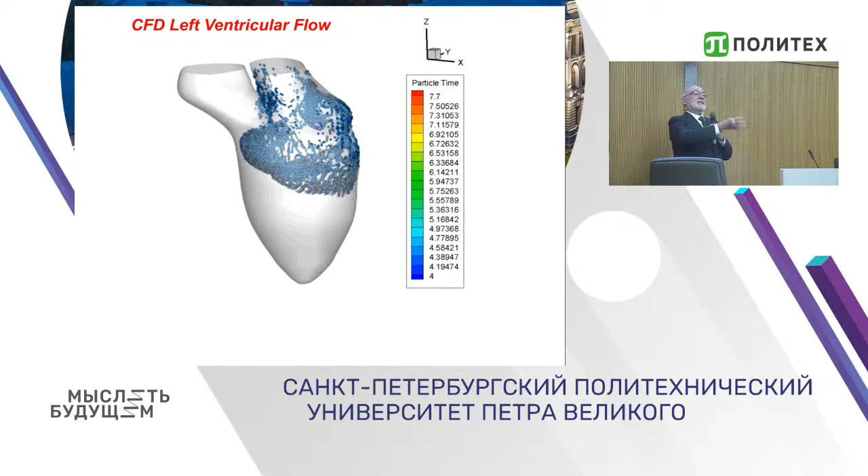But there is a whole community of biomedical engineering where they study particles. Particles in the air, in lungs, particles in the blood, particles in the heart. So I can tell you, if you choose the field, then you will find the particles, the fluid, and the structure. The structure could be the wall of the aorta. Well, I will not show you more videos, because what you see is basically the same: particles moving, and the mechanics. The pictures are nice, but the mechanics is completely different.

Another case here for the design of this valve. Not to mention the structure, but structure I would say is the easy part. It's not easy, but it's the easy part. So this is the conclusion. That combination of methods.

But of course, how about everything that I have not said? How about high performance computing? How about artificial intelligence? What does it mean, artificial intelligence? Machine learning, deep learning. How about reduced order modeling? Data-driven computing, quantum computing, Internet of Things, that means devices that can talk to us. These metamaterials that have unique properties, because you actually design the material and then you manufacture the material using additive technologies. All this in the context of energy sustainability.

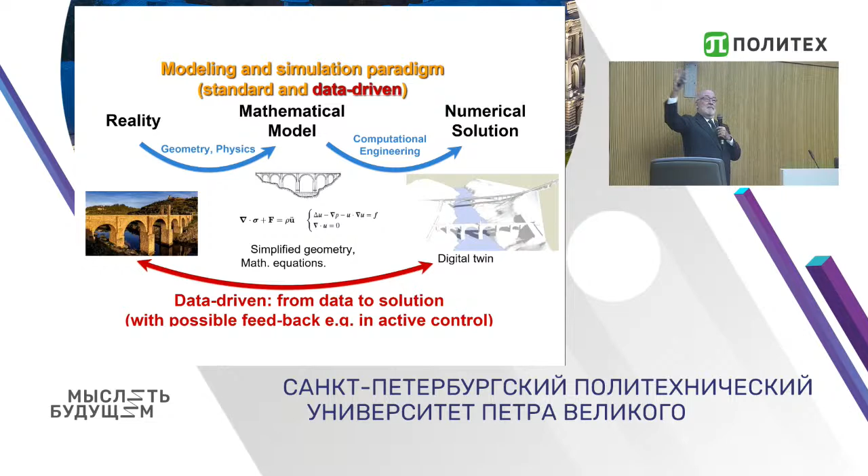We are now trying to use reduced order modeling to understand how billions of particles could be modeled in a single, I would say, reduced neural network, to educate a neural network for these particulate fluids. So in the middle you have the neural network. At one side you have the offline computations to educate the neural network. And then from that you will use it for the particulate fluids. This is something we are working on. We have published a couple of papers. So this is a completely new world. And these are some results of this.

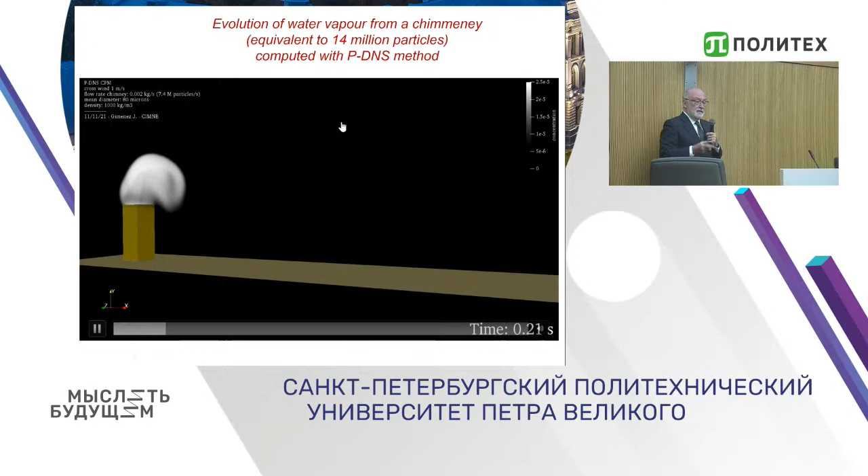For sneezing, we have produced a paper on the effect of sneezing in humans. Or this is the last paper. This is the last image they gave to me this week. Water vapor from a chimney computed with this method. Anyway, I anticipate a very challenging and promising future for the development and application of numerical methods in engineering for the benefit of humans. It's important, the last sentence.

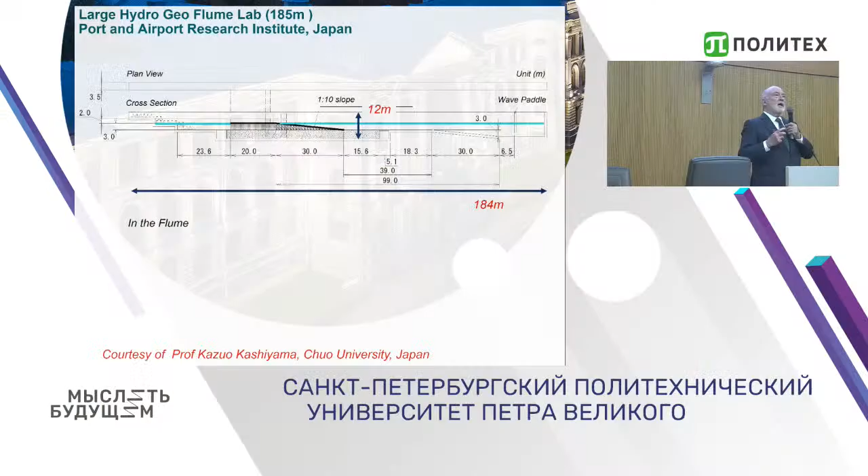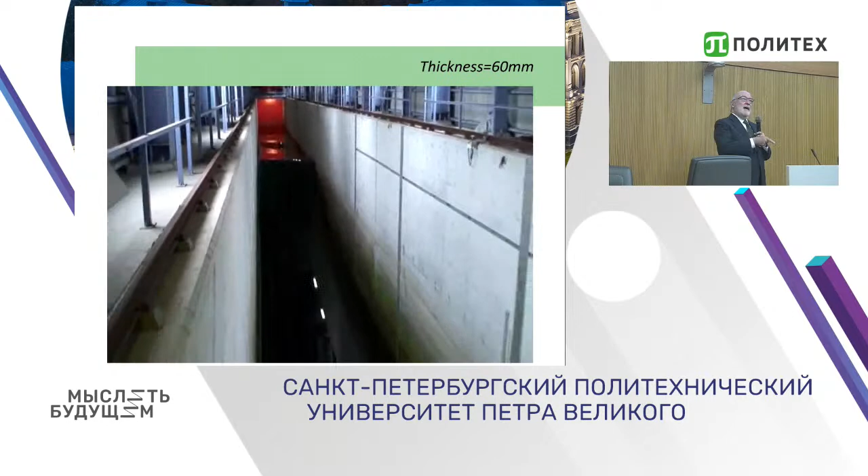Things go quite slow, you know. Things take time. I don't know if you refer to how the world is actually trying to get some insight. In Japan, for instance, they have performed a validation test in this canal. They took a wave impacting on a wall. So here you have the wave coming. If you want to break a wall in a lab, how do you do it? Well, you need this big and expensive lab.

This is the only place in the world where I have seen this. I can show you now our simulation that predicts this. It has taken us almost 5 years of development to get these tools, but now they are ready to use, though still very difficult to use in practice. I don't know if you mean the complexity of the problem.

The complexity is that the sea you have to model with 2.5D, shallow water. But then near to the shore, you need 3 dimensions, and this is still too expensive. Are you referring to this? So we can do this problem, but still we cannot reproduce the tsunami because we cannot model all the houses. So I think we are still quite far from it.

We model the houses as rigid bodies. Still, we need to introduce a lot of simplifications to model the real problem. We are at the laboratory, at the experimental level. We are still starting.

Well, of course. But you see, in Japan, where they suffered the tsunami, they have been able to produce this simple experiment. This is very difficult, and now we have a reference. We can compare our methods. The next thing will be to do another experiment. You cannot break a house, you cannot break a bridge. But I think in the next 20 years.